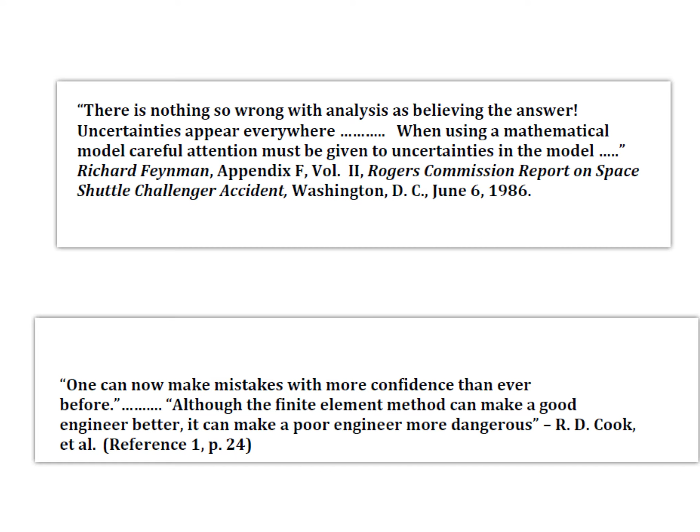So with that, we will move to the first example in our hand, that is the single bar element. The whole course is arranged in such a way that we will learn through examples. This is a simple one-dimensional finite element used to model a slender structural member loaded axially. Through this example, I would like to convey the concepts of linear static analysis and what finite element equations look like.

So this is the example we are going to see, where we have a bar of cross-sectional area 100 square, made up of steel. These are the properties corresponding to steel, and it is acted upon by an axial load of 1000 Newton, and it is fixed at this location. The cross section, for the time being, you can assume as a rectangle like this.

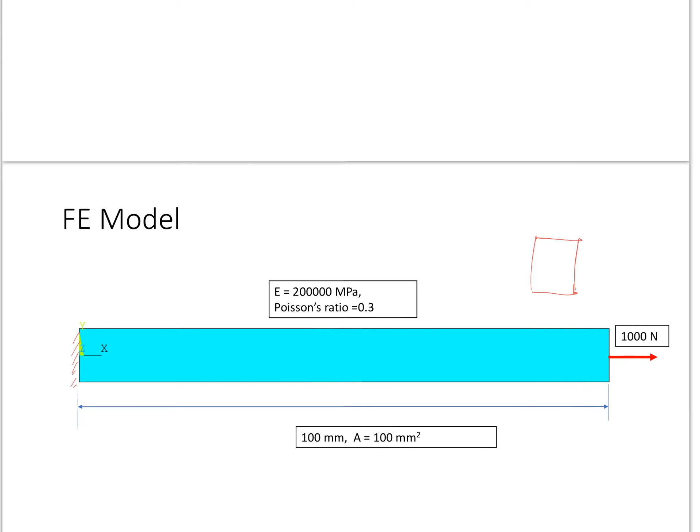This course is not specifically meant to make you an expert in one particular commercial software, but to convey certain concepts which are applicable across multiple commercial software packages. For the time being, I'm using ANSYS APDL to solve this problem, and what I have shown here is the command stream which I used to create this model in APDL.

Since this is the first example, I will run through this command stream. But if you're not aware of these things, you can skip ahead, because this is just the technique to create the model in APDL.

This command essentially tells that we need an element type which is Link 1. In ANSYS APDL, they call it the 2D spar element. This element permits only uniaxial tension or compression with 2 degrees of freedom at each node. Bending is ignored. Here I am defining my material properties.

Here I am defining a real constant whose value is 100, because the cross-section area of my bar is 100. In order to assign that, I'm defining a real constant. Here I'm creating two nodes, one at the origin and the other at 100 mm along the x-axis.

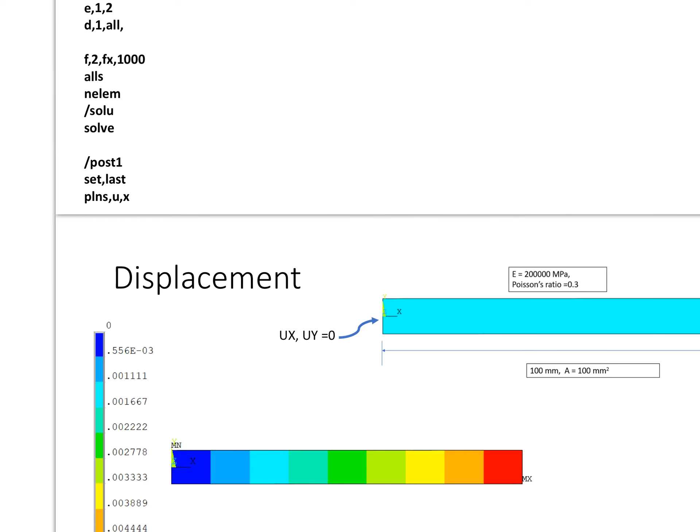Now I'm solving it, then I'm looking at the x direction displacement. This is how the x direction displacement will look like. Let me zoom out for better visibility. So as you can see over here, at this point displacement is 0, and as we move ahead to the right, displacement increases, and the maximum displacement is 0.005 mm.

There is another important concept in finite element analysis, that is using consistent units. That's a topic for another day, so for the time being let's not talk about that.

Does the answer make sense? To check that, we can use our closed form solutions. Since this problem is very simple, the deflection is given by this expression, where P is the load, L is the length of the bar, A is the area of cross section, and E is the Young's modulus. We can simply plug in the values and check whether we are getting 0.005 mm.

Once you plug in the values, you will get this answer, and it is matching, or in consensus with the closed form values. Here, when I evaluated this using closed form expressions, I used consistent units. So the same holds true in analysis also.

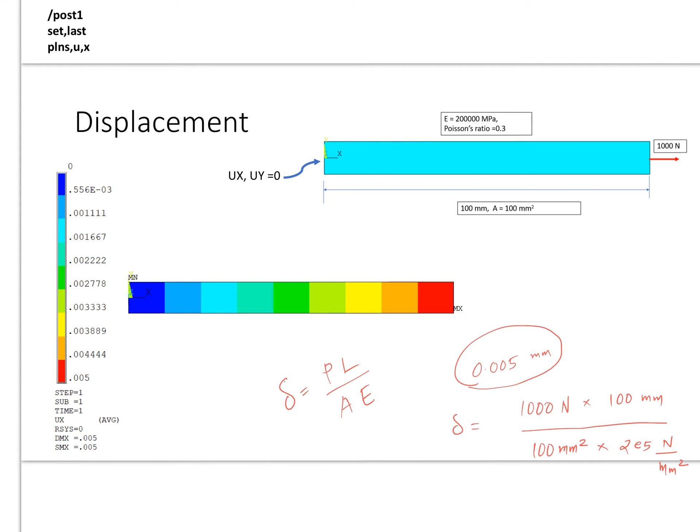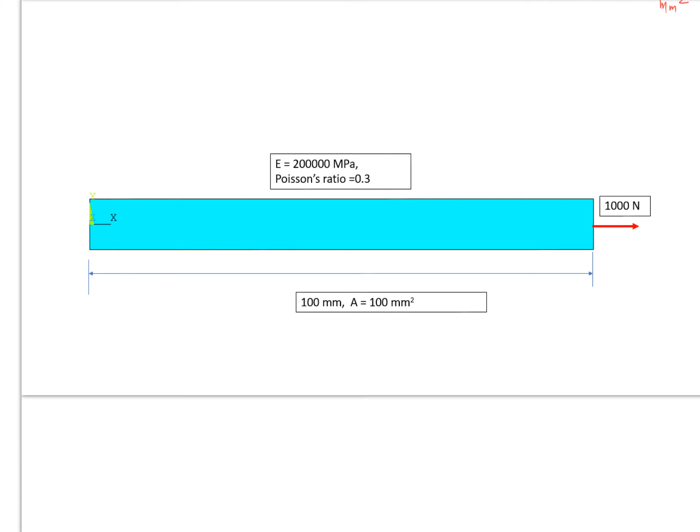I have a very simple problem for you. What will happen to the displacement if I augment this value to 2000 Newton? Hold your thought, come back with an answer. Since we are doing a linear static analysis, when we increase the load by a factor of 2, the resulting displacement should also get augmented by the same factor. Let's see what happens when we increase the load.

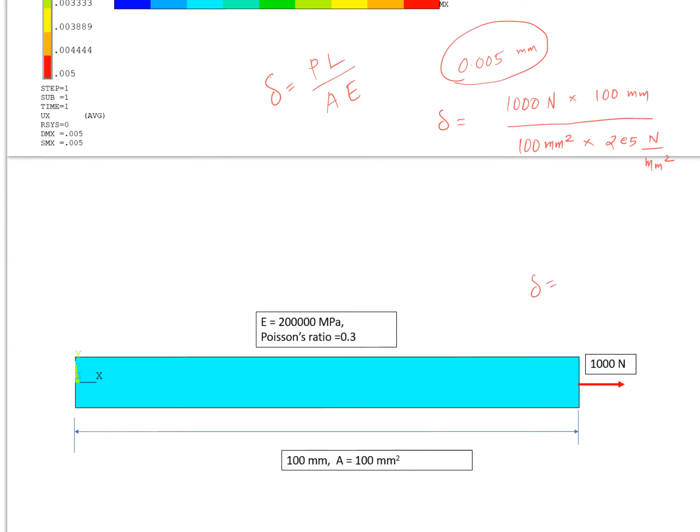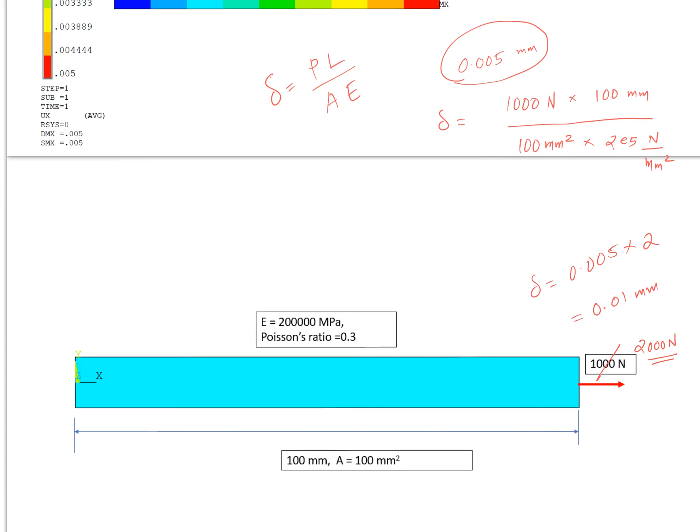I don't think I have a plot for that, but if you do the analysis by just changing the load, your deflection should be 0.005 times 2, which corresponds to 0.01 mm. The load is no longer 1000 Newton, it's 2000 Newton. So things scale linearly when doing a linear static analysis. This won't be the case in a nonlinear analysis, because you cannot scale your results when there is some nonlinearity in the problem, and the method of superposition also doesn't hold true.

Another question: what do you think the free body diagram of the bar will look like? If this is the bar, I'm applying a load of 2000 Newton here, and I've given a fixed boundary condition over here, so there should be a reaction force of 2000 Newton.

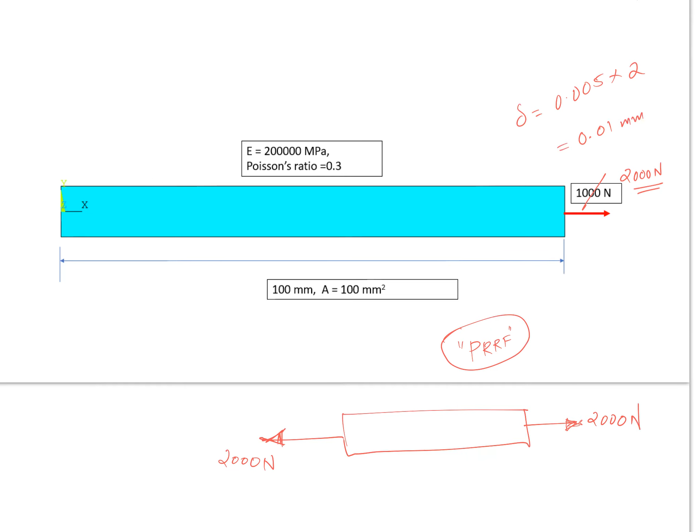In ANSYS APDL, there is a command PRRF to get the reaction forces. If you are using different software, the concept of reaction forces holds good, but there will be another command which gives you the reaction forces. So this is how the free body diagram will look like. The force acting at the location where we've provided a boundary condition is called reaction force. Even though in this example the reaction force appears pretty straightforward, when you do a complex model, understanding the reaction force in an assembly is very important.

Just a moment before, we wrote this expression for the displacement in a bar like this. I can rewrite the equation like this, where the load acting in the bar can be written as a product of these two quantities. Let me just replace u by delta. Actually, all finite element equations resemble this. Why am I saying that? When you have many degrees of freedom, here in this case you have just one equation, but when you go to multiple degrees of freedom...

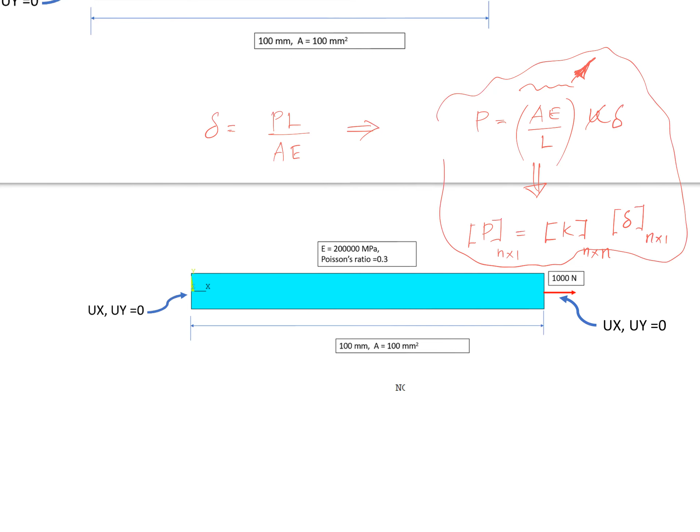This equation takes a form like this, where p is no more a scalar now, but a vector, and this quantity, which was the stiffness of your bar, becomes a stiffness matrix. If this is of size n by 1, then your stiffness matrix will be of size n cross n, times the deflection, which is again a vector now of size n cross 1. So you can extend the concept to a finite element model having multiple degrees of freedom as well.

Just wanted to tell you that, so always keep this in mind. For a linear static analysis, the beauty is that the stiffness matrix doesn't change with respect to load, or with respect to the boundary conditions. But when you do a nonlinear analysis, this K becomes a function of maybe the displacement, maybe the stress in the element, and brings in a lot more complexities to the model.

Good, the final aspect I want to address. Let's say now I am slightly modifying my boundary conditions. I am fixing on either ends. What will be the stress state? What will be the displacement inside the bar? That was question 1. I have a question 2 as well.

Now, say the initial problem itself, the same bar, but this time instead of applying 1000 Newton, I'm pulling this face by a displacement of 0.005 mm. What will be the reaction force at this location? What will be the reaction force at this location? I hope you will think about both these questions in your mind.

The answer will be in the next video, where we will discuss more about single bar elements and linear static analysis. To summarize, we saw it is very important to understand finite element theory, and we saw a very simple example with a single bar element. We applied the load, then saw the displacements, and it was in consensus with the closed form solutions. We increased the load, and the displacement also increased by the similar factor, showing that we are doing a linear analysis.

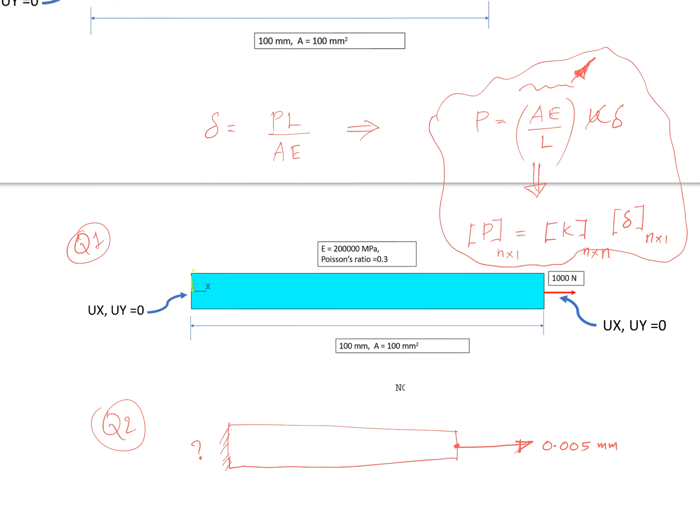I also explained that in a general finite element analysis, this is the form it takes. The equations take this form, where this is your stiffness matrix, this is your displacement vector, and this is your load vector. Thanks for watching. In the next video, we will discuss more about this example problem, and I will have answers to these two problems. Thanks.